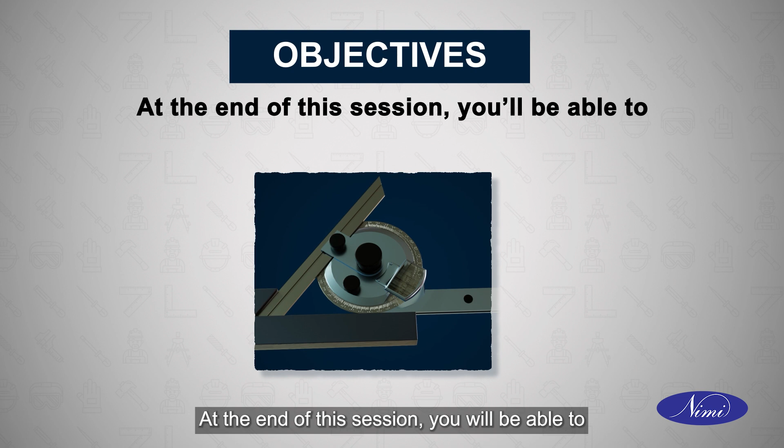This session is on practicing the use of angular measuring instrument. Let us begin with the session. Let us look at the objectives of this session. At the end of this session, you will be able to measure the different obtuse angle of components using vernier bevel protractor. Read vernier bevel protractor for obtuse angle setting.

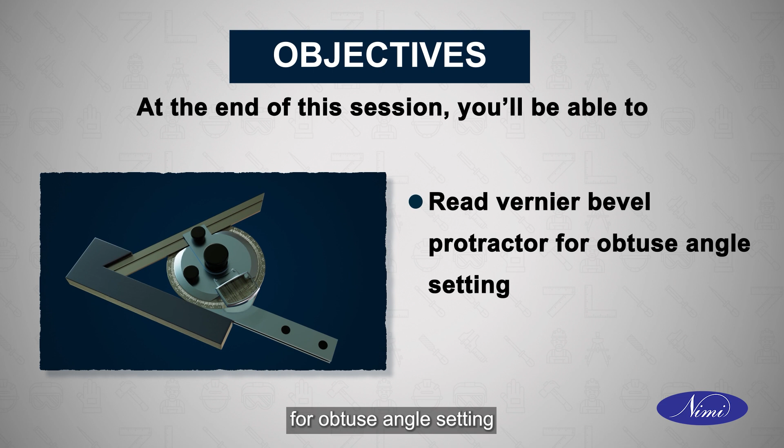Let us look at the tools required for the procedure. Steel rule, bench vise, tri-square, files of different grades and sizes, marking media, dot punch, ball peen hammer, anvil, surface table, angle plate, vernier height gauge, drills of various sizes, drilling machine, chuck key, small flat chisel, hacksaw blade with frame, vernier bevel protractor, vernier caliper, lubricating oil.

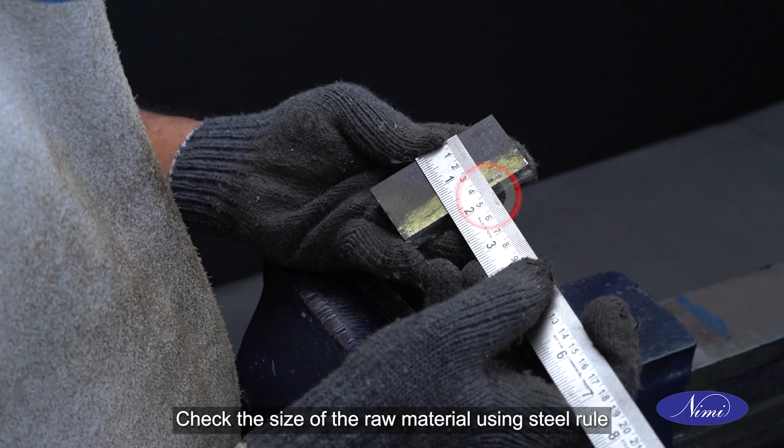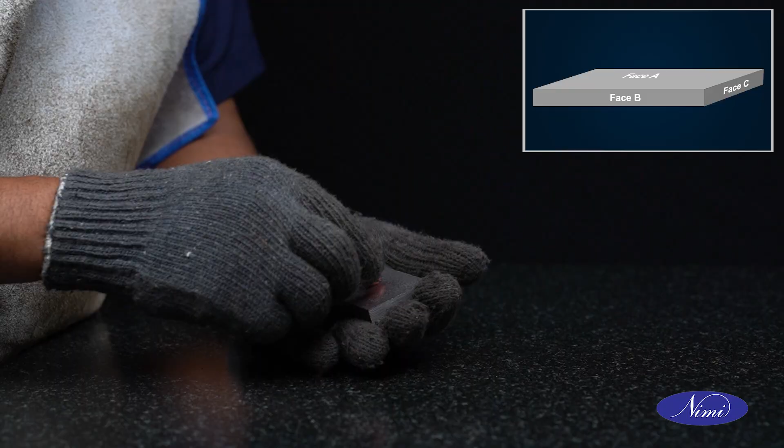Let us now learn to prepare specimens for measuring angles using vernier bevel protractor. Check the size of the raw material using steel rule. File all the faces using bastard file. Ensure parallelism and perpendicularity using a tri-square. Apply marking media on face A.

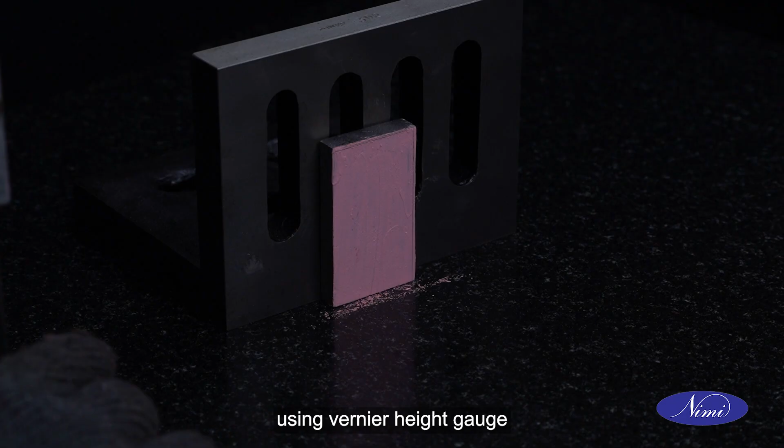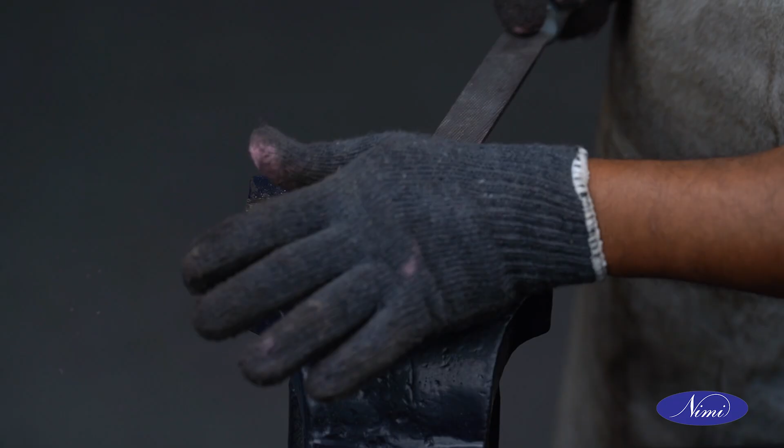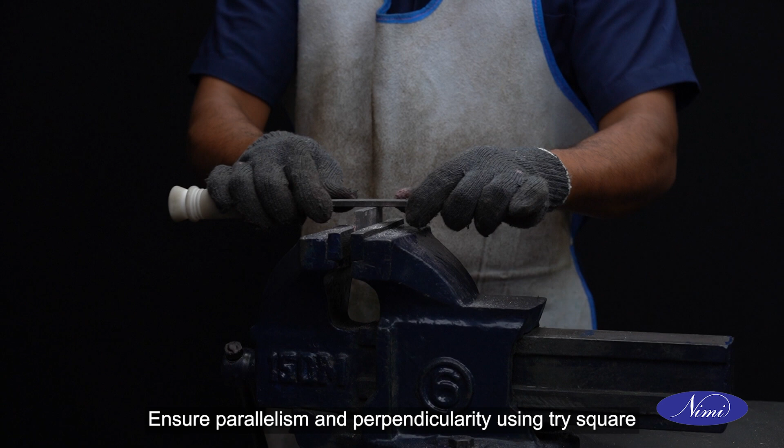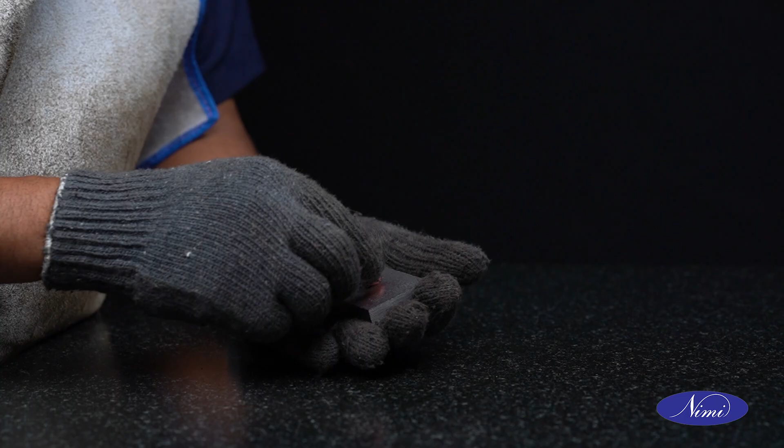Mark to size of 70 mm by 40 mm using vernier height gauge. Witness mark on the workpiece using dot punch and ball peen hammer on an anvil. File and finish to the respective sizes using various grades of files. Ensure parallelism and perpendicularity using tri-square. Check the dimensions using steel rule. Prepare 4 such pieces with the above mentioned procedure for preparation of specimens.

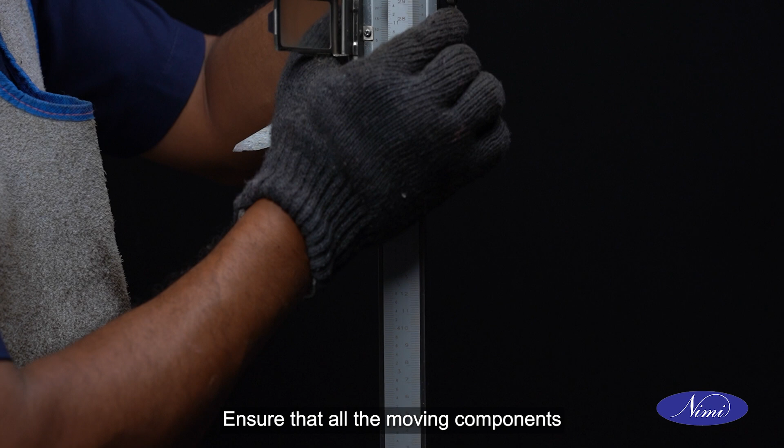Again, apply marking media on face A. Clean the surface table and angle plate. Ensure that all the moving components of the vernier height gauge are functional. Support the job with the help of an angle plate on the surface table. Let us now learn to prepare specimens.

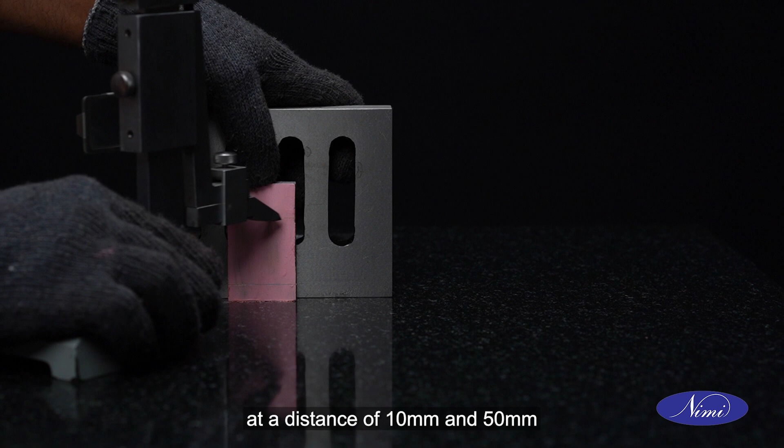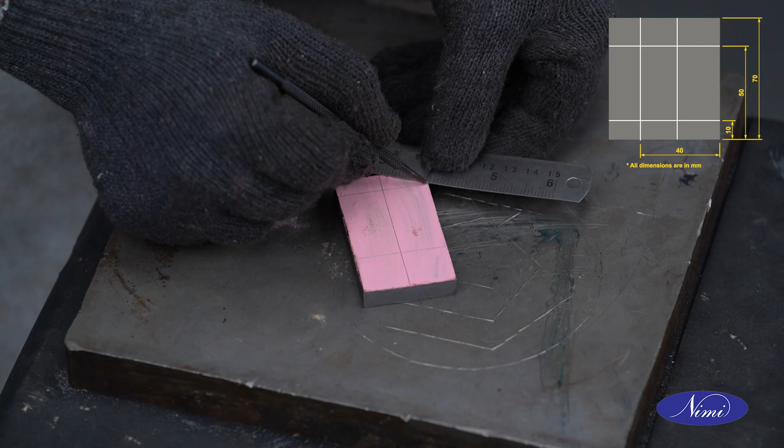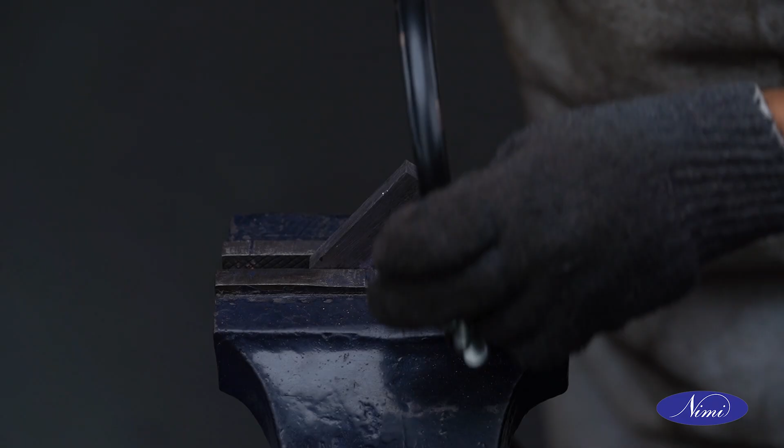Mark parallel lines at a distance of 10 mm and 50 mm from face C using vernier height gauge. Mark a line at a distance of 20 mm from face B. Draw the profile lines using a scriber and steel rule to obtain the required profile. Witness mark the profile using dot punch and ball peen hammer. Remove the excess material by hacksawing on a bench vise. File and finish using different grades of files.

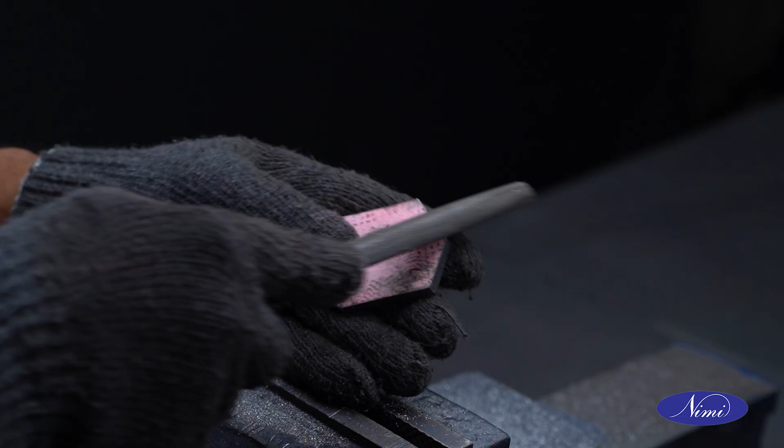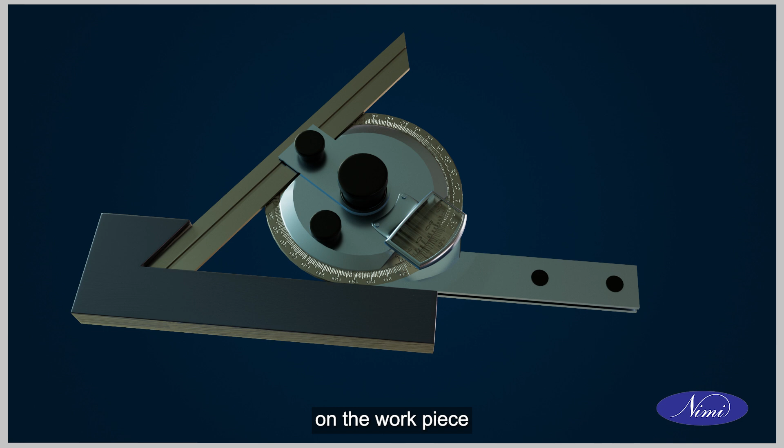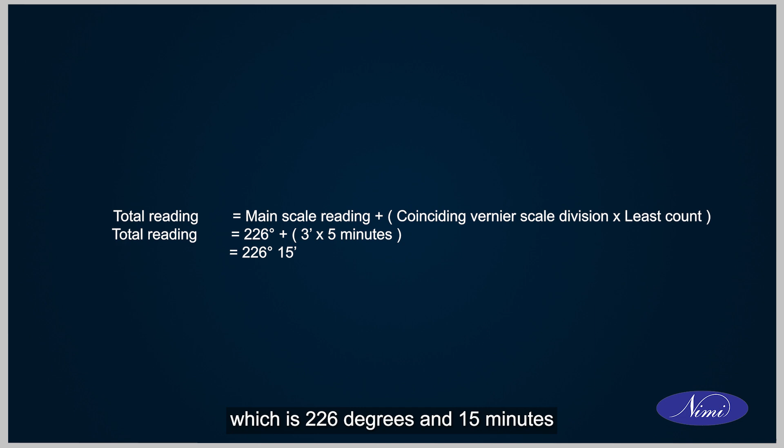Deburr the specimen 1 using small flat file. Position the vernier bevel protractor on the workpiece as shown in the diagram. Total reading is equal to main scale reading plus coinciding vernier scale division into least count. Total reading now equal to 226 degrees plus 3 into 5 minutes, which is 226 degrees and 15 minutes. Note the reading on the main scale in degrees between the zeros of the main scale and the vernier scale.

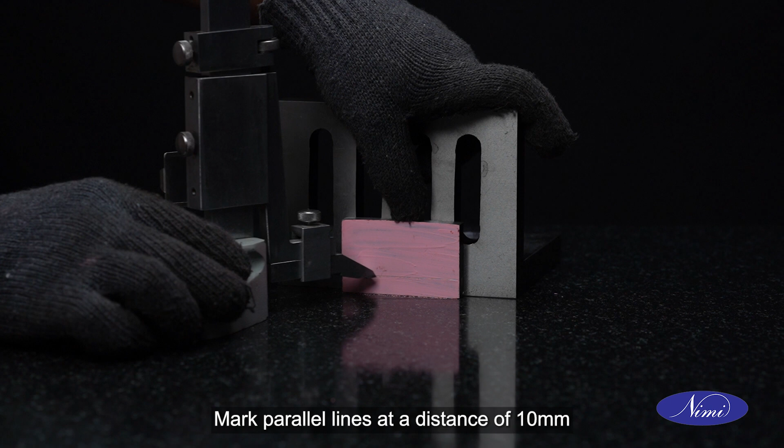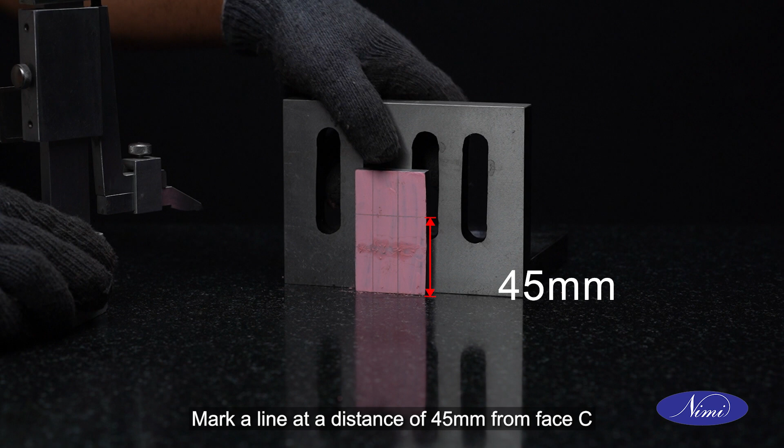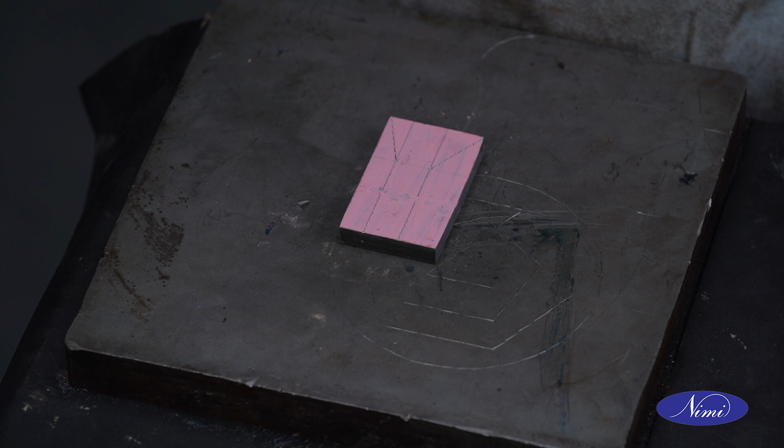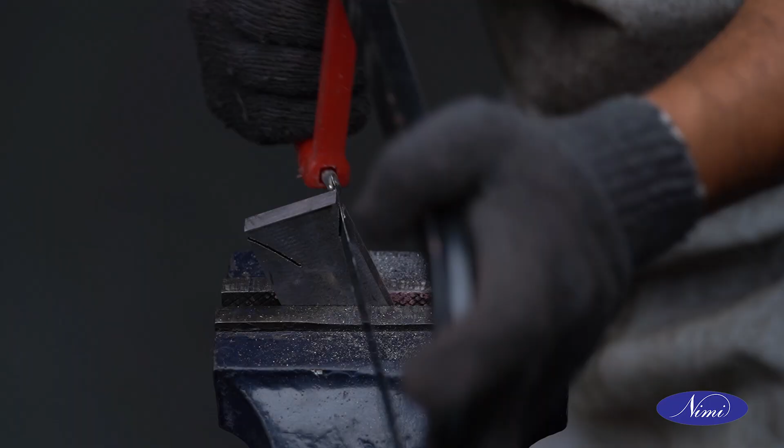Mark parallel lines at a distance of 10 mm and 25 mm from face B using vernier height gauge. Mark a line at a distance of 45 mm from face C. Draw the profile lines using a scriber and steel rule to obtain the required profile. Witness mark the profile using dot punch and ball peen hammer. Remove the excess material by hacksawing on a bench vise. File and finish using different grades of files.

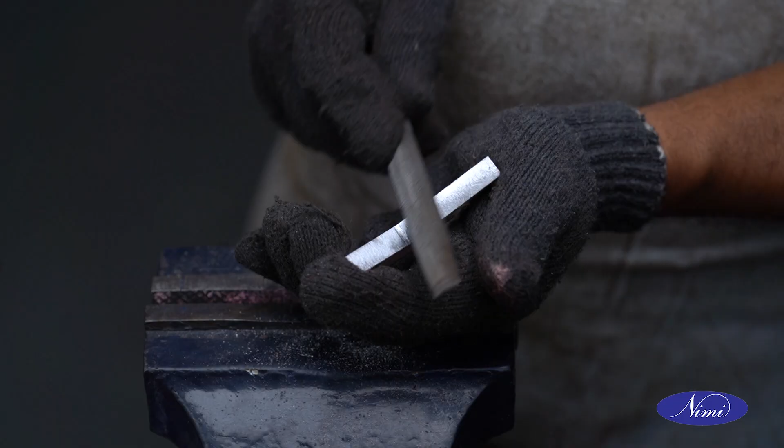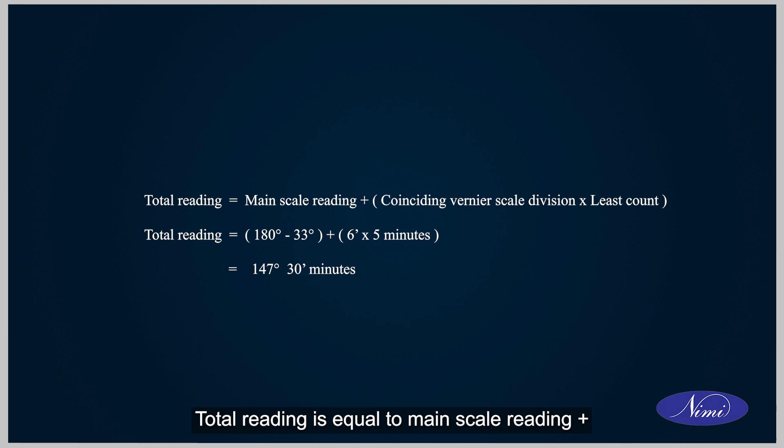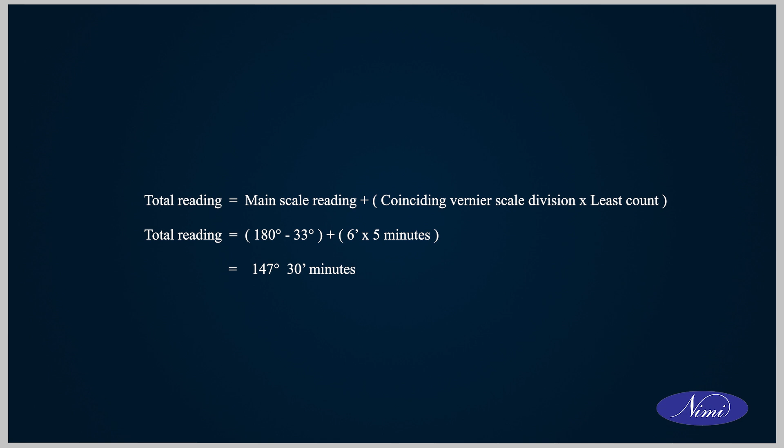Deburr the specimen 2 using a small flat file. Position the vernier bevel protractor on the workpiece as shown in the diagram. Total reading is equal to main scale reading plus coinciding vernier scale division into least count. Total reading is equal to 180 minus 33 degrees plus 6 into 5 minutes, which is equal to 147 degrees 30 minutes.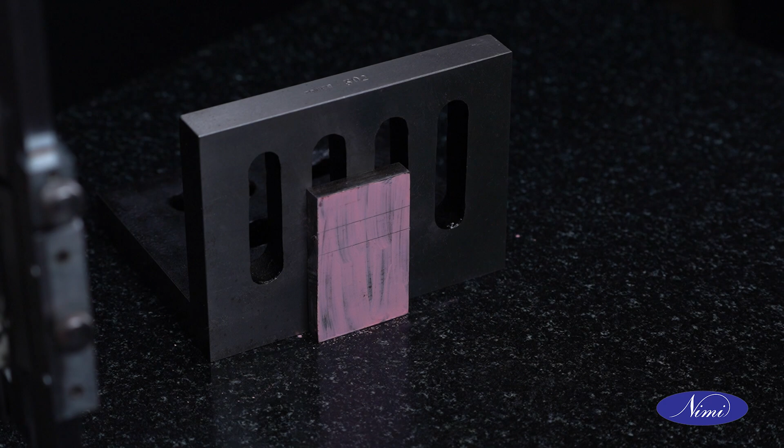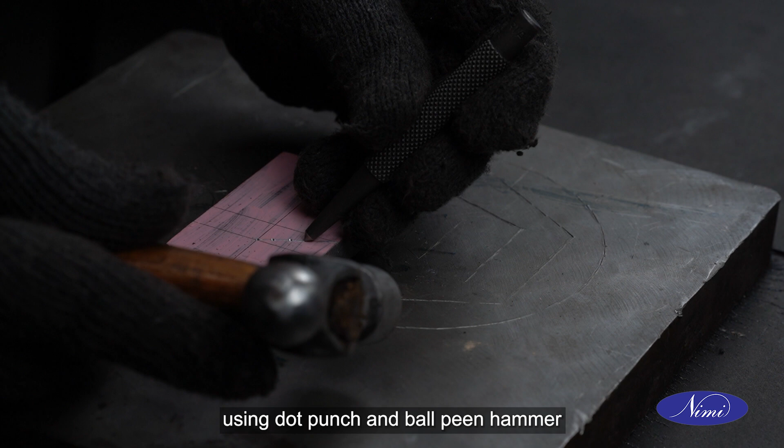Mark parallel lines at a distance of 35 mm and 50 mm from face C using vernier height gauge. Mark a line at a distance of 20 mm from face B. Draw the profile lines using a scriber and steel rule to obtain the required profile. Witness mark the profile using dot punch and ball peen hammer. Remove the excess material by hacksawing on a bench vise. File and finish using different grades of files.

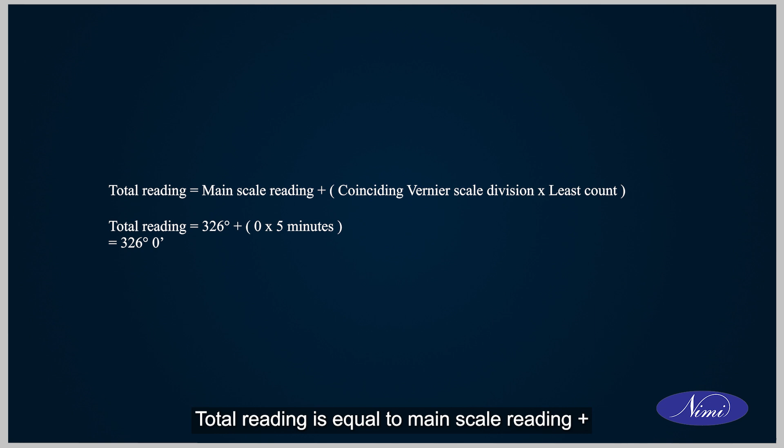Deburr the specimen 3 using a small flat file. Position the vernier bevel protractor on the workpiece as shown in the diagram. Total reading is equal to main scale reading plus coinciding vernier scale division into least count. Total reading is equal to 326 degrees plus 0 into 5 minutes, which is equal to 326 degrees 0 minutes.

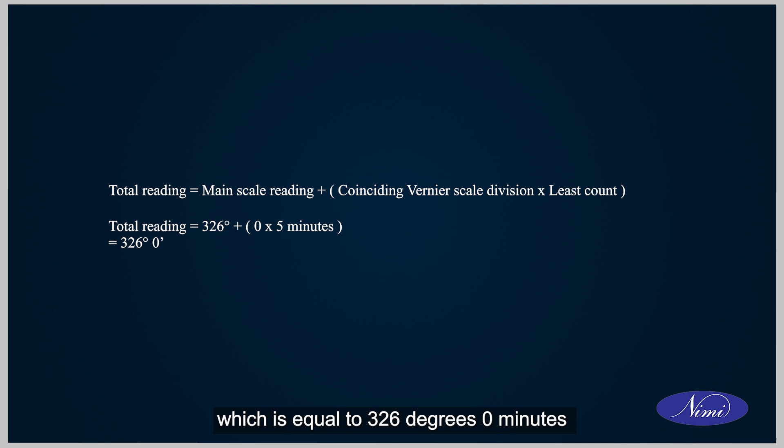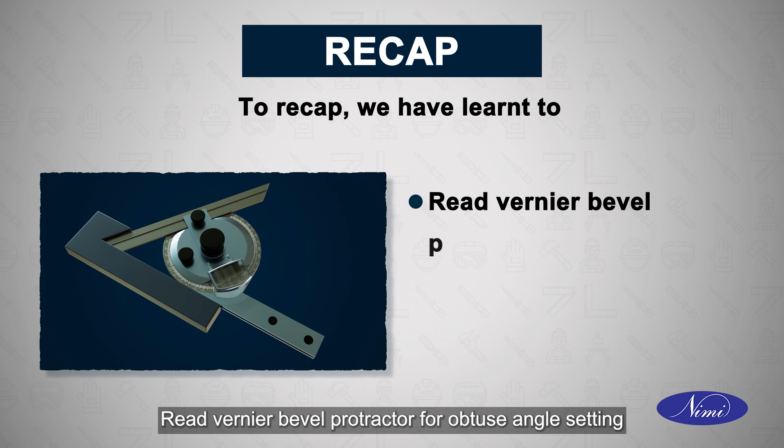To recap, we have learned to measure the different obtuse angle of components using vernier bevel protractor, and to read vernier bevel protractor for obtuse angle setting. So that's all about practicing the use of angular measuring instrument.